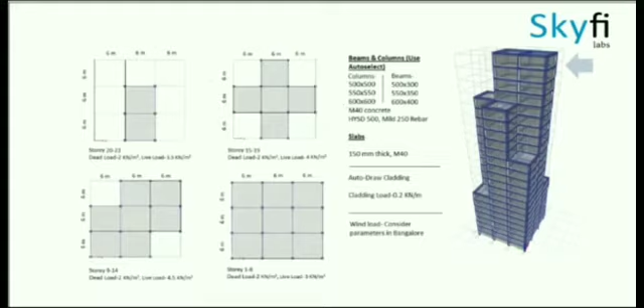Design using ETABS, considering wind load parameter in Bangalore. By looking at this figure, we can see the various beams and columns that have been given, and we have to use auto select option for both beams and columns of various sections, considering M40 concrete and HYSD 500 and mild 250 rebar, and the slab has 150 mm thick, and the various sections and grid lines as shown in the figure have to be constructed.

Now go to define and add materials, and define for the materials M40, mild steel 250 and HYSD 500 by adding new materials. Again go to define.

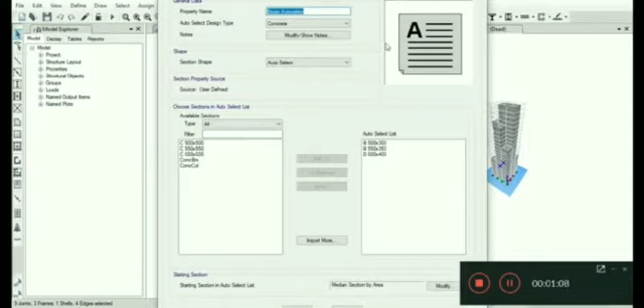Section properties, and add beams and columns by adding a new property and selecting the given dimensions in the questions. I have already added, and we have to select an auto select list as shown in this property. The property of the list can be added by selecting add property and selecting the add property list.

Similarly, columns should also be considered. Now again go to section properties and add slab of 150 mm. Using draw option, carefully draw beams and columns. Here I have already drawn.

After drawing carefully as per given questions, loads have to be assigned. On slabs, a uniform load of dead load and live load have to be given as per the given question. And on cladding, 0.2 kN per meter is given on the beams.

Now go to the ground floor as shown in the figure. Z is equal to 0 meters, and select all the joints, and go to assign and joints, keep it as fixed.

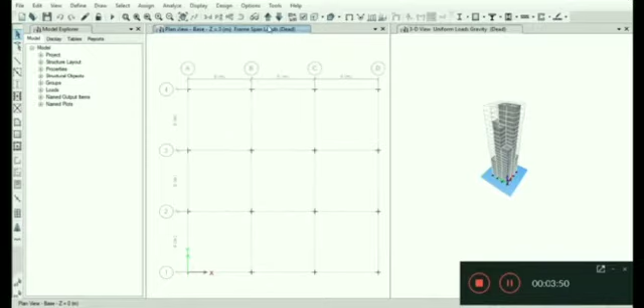Now we will view all the loads acting on the structure. Now we are looking at cladding load. Now we will look at dead load and live load acting on the slabs.

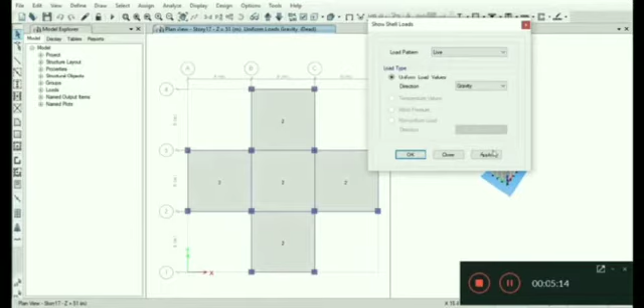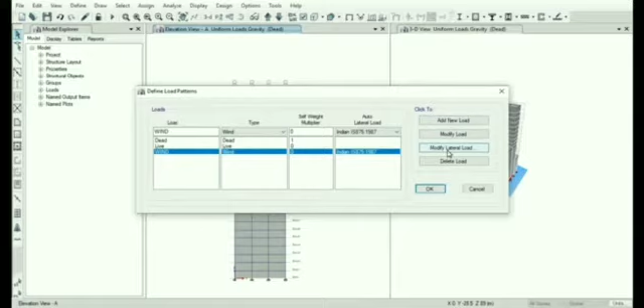To assign wind load, go to assign and define load patterns, and in there we have to use IS code to determine the various parameters. The first one, we have to consider the velocity, the wind speed. In Bangalore, from the map we can see that it is 33.

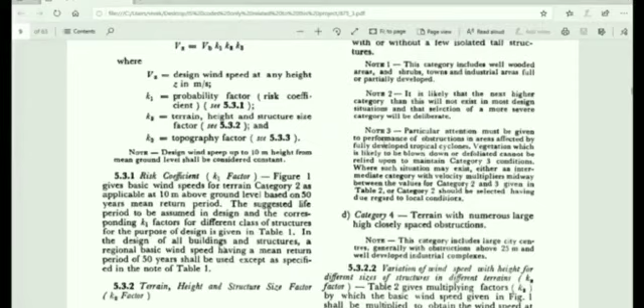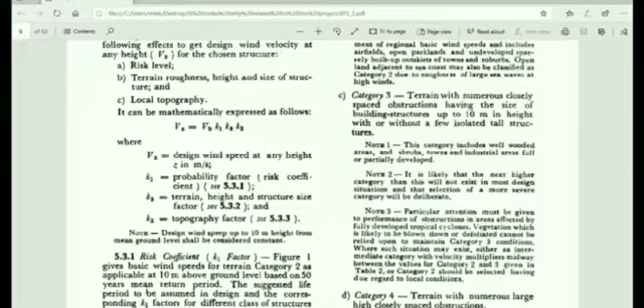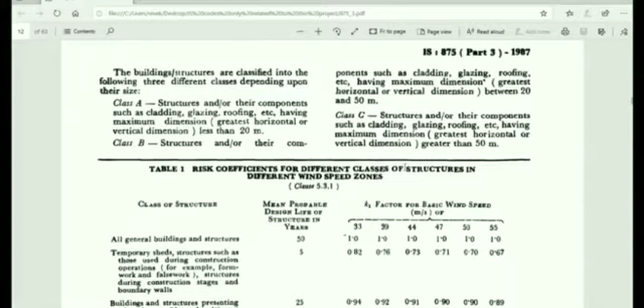Terrain category, the next one is terrain category. From the code we can see that it belongs to category 3. And for the class, again by looking at the IS code, we can see that the structure belongs in class B, as it is between 20 to 50 meters in height.

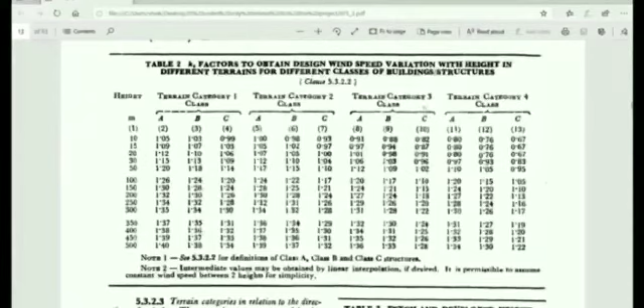The coefficient is 1, and the K3 factor is also 1 because the upwind slope is less than 3 degrees.

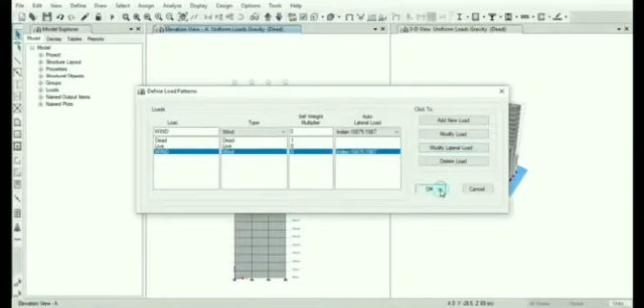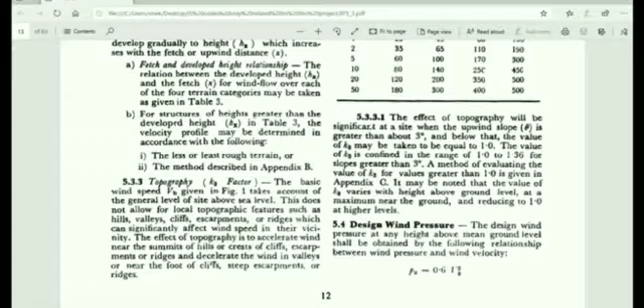Wind load has to be assigned by going into the elevation and assigning the shell loads as given by the IS code. This can be viewed in the video.

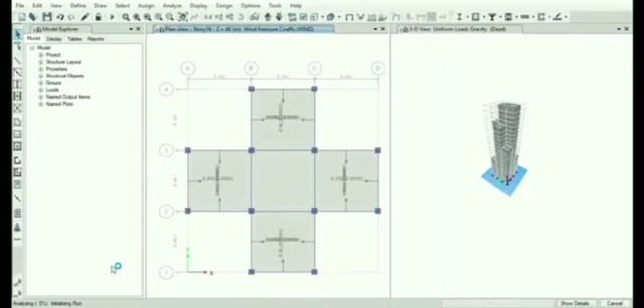It will take long time as the number of floors are high, so I have fast forwarded the video. We can view the deformed shape of the structure, and also we can view the bending moment and shear force of the structure.

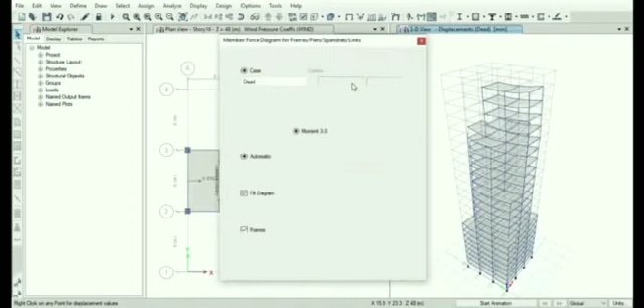For designing, go to the Design tab, Concrete Frame Design, and click on Start Design Check.

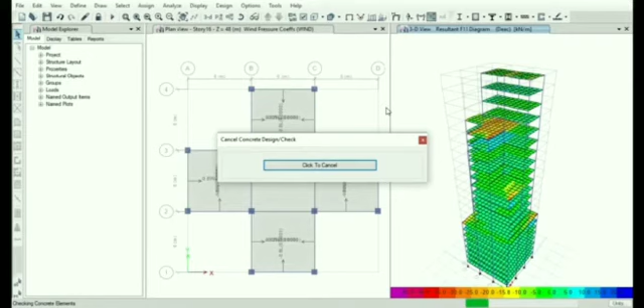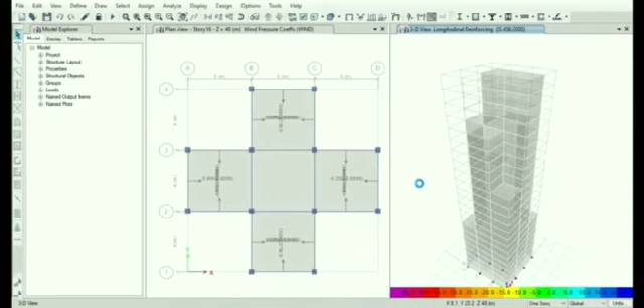After checking the design, it will prompt, and after clicking on yes, it will reiterate and redesign on its own. Again, it may prompt with the failed members and again try to reiterate the structure.

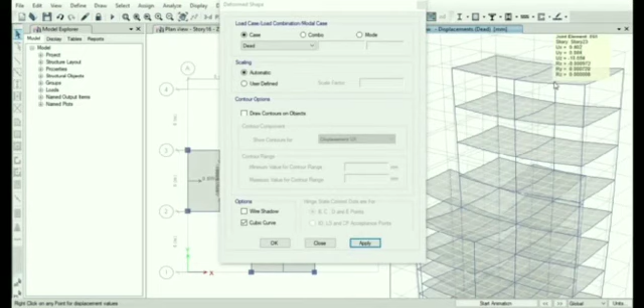Now the design is complete. To check whether all the members have passed, go to Design, Concrete Frame Design and click on Verify All Members. Now it has prompted that all the members have passed. Now the design is completed.